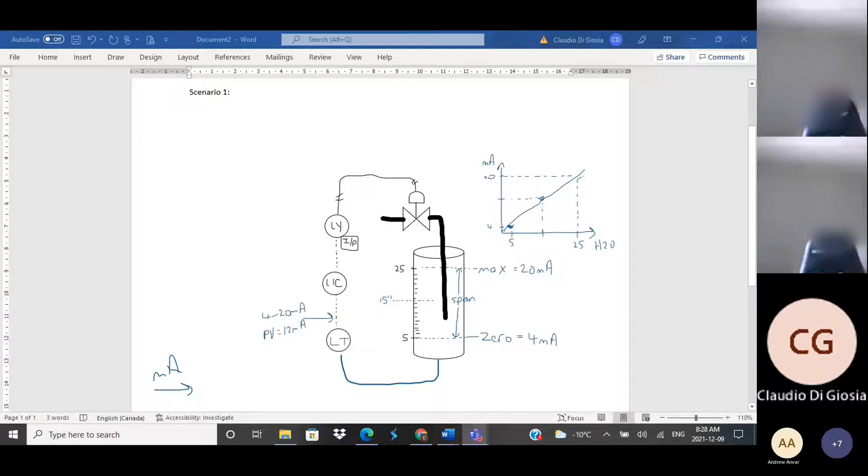So we've got a container of liquid. What we're saying here is that we have a minimum of 5 inches of liquid, which is our zero value. We're going to set our maximum to 25 inches of liquid, which is going to be our maximum value.

That's going to be proportional to a 4 to 20 milliamp signal that the level transmitter will transmit to the level indicator controller, the controller. So the controller is reading a 4 to 20 milliamp signal, and that signal is proportional to the level of the liquid in the container.

Now on the output side, the controller outputs a signal that's proportional to the error, and the error is what you have minus what you want. So your set point is what you want, the actual level is what you have. It generates an output proportional to that.

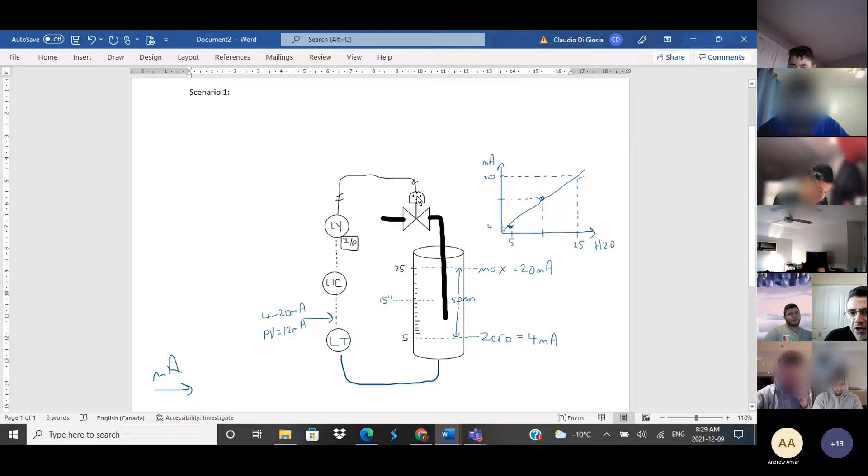That also is a 4 to 20 milliamp signal, which converts into a 3 to 15 psi signal. That 3 to 15 psi signal modulates the valve, either opening or closing it so that there's more or less liquid going through. But before we talk about all of that, this is how this whole system works.

I'm going to give you a scenario just to learn how to convert between signals. So this is a scenario: if the level transmitter is transmitting a 12 milliamp signal to the controller.

How many inches of water is there in the column of water, okay?

And just to be sure that you know what the signals we're using are, we are using a 4 to 20 milliamp system. The zero value is 5 inches of, let's just say, water, and the maximum level is 25 inches.

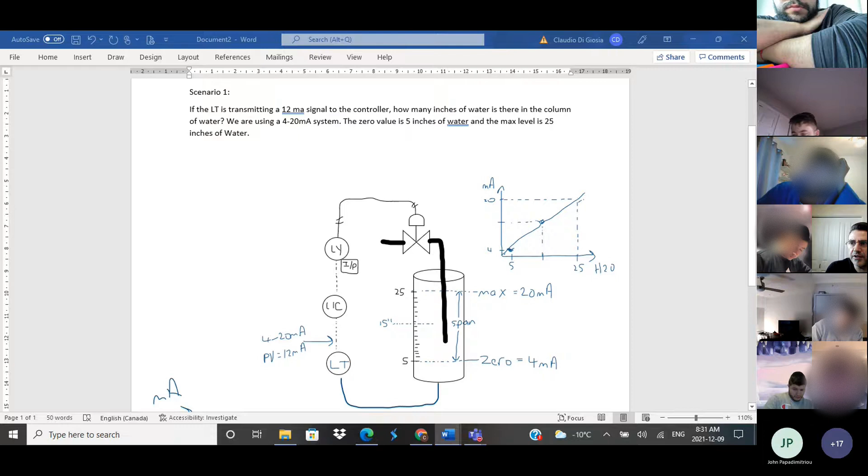So that's what we have. We have a container. The min is 5 inches, the max is 25 inches. So the signal being sent to the controller, which represents the 5 to 25 inches of liquid, is a 4 to 20 milliamp signal. So what we have to do to find the value of how many inches that represents, we have several steps.

Step one: what we want to do first is find the percentage, the span. And that is your PV, which is your process value or present value, which is what I'm giving you.

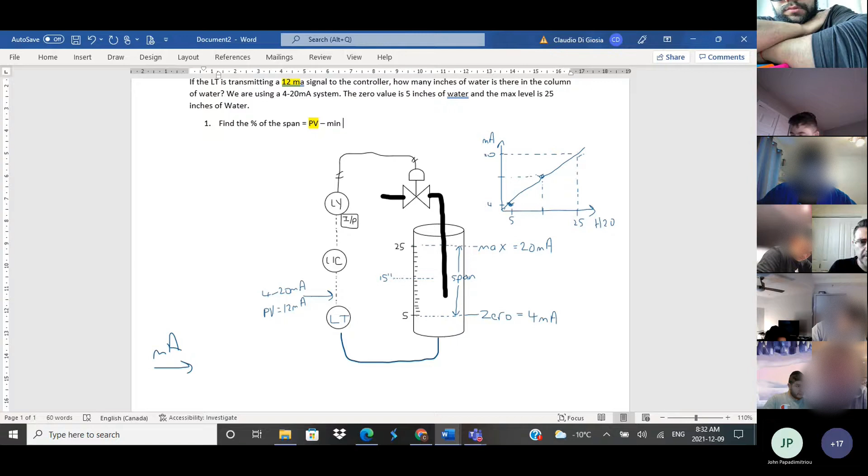In this case, the PV is 12 milliamps. That's the value I'm giving you. So PV minus the min, and that's going to be divided by max minus min.

So you've got an equation here. Percentage, how do you get it? PV minus min over max minus min.

So where do we go from here? Well, from here, what we're going to do is say, okay, what is my PV? Well, my PV is 12 milliamps. We're going to subtract the min, which is 4 milliamps.

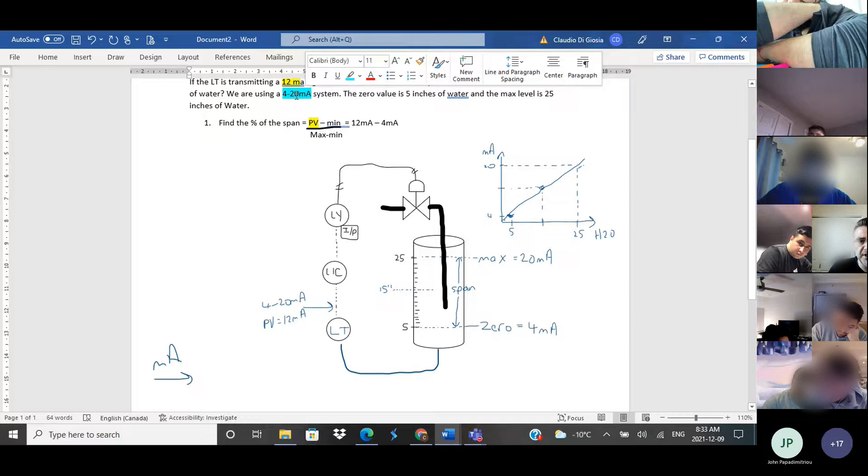Why is that the min? Well, we have a 4 to 20 milliamp signal. So if we have a 4 to 20 milliamp signal, the min is 4 milliamps, the max is 20 milliamps. So PV, the given value, 12 milliamps minus 4 milliamps over max minus min. What's max minus min? Well, the maximum of a 4 to 20 milliamp signal is 20 milliamps minus the min, again it's 4 milliamps.

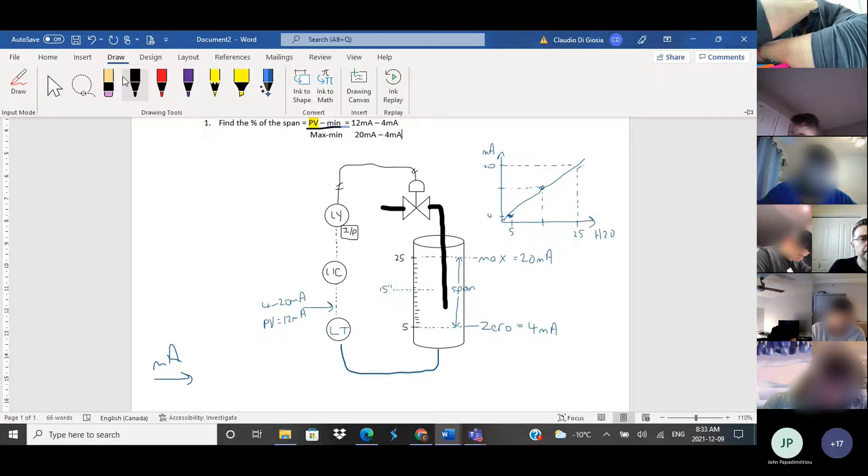Sir, isn't the zero the min value? The zero value is the minimum value, so how come you said it's 5? No, we're trying to find the percentage of what percentage 12 milliamps is within a 4 to 20 milliamp signal. That's the percentage we're looking for. This has nothing to do with water yet. We're trying to get the percentage: 12 milliamps is what percentage of this range, or this span.

So bear with me. If we do the math here, we end up with 12 minus 4, which is 8 milliamps, over 16 milliamps.

All right, and that gives us 50%. That is step 1. All that does is tell us that the level transmitter is transmitting a 12 milliamp signal, and that 12 milliamp signal is half, or 50%, of the span. What span? The span is max minus min of the range. So a 4 to 20 milliamp signal, 20 minus 4 is 16. 12 milliamps is half of the 16 milliamp range, so it's at 50%.

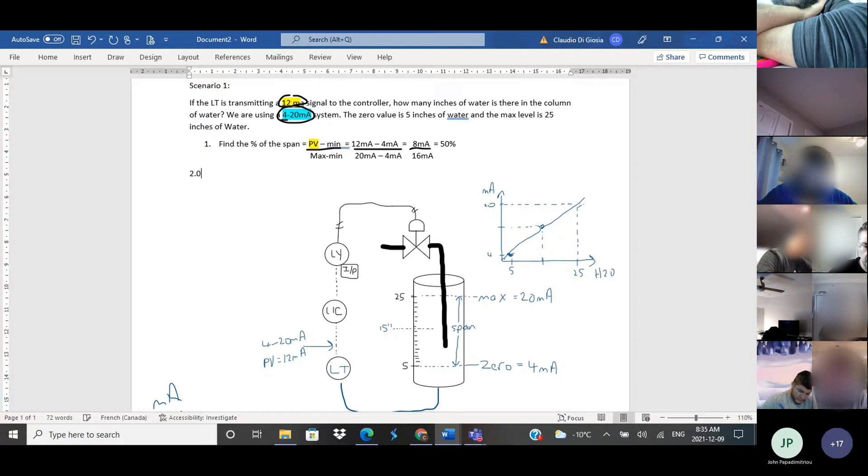But that's only step 1. We still have 3 more steps to go to get the answer here. So step number 2 is going to be, you've got to calculate the span of the variable you are converting to.

What are we converting to? We want to take that 12 milliamps and know how many inches of water that is. So if we know that 12 milliamps is 50% of a 4 to 20 milliamp signal, that means that 50% of the level in the container of liquid is what we want to calculate. So 12 milliamps is equal to what? What is 50% of the span between 25 and 5?

So we have 3 more steps to go. I'm breaking it down. Eventually you can take some shortcuts here, but this is just to make you understand how the actual conversion works. Converting to, in this case here, we're looking at water, H2O.

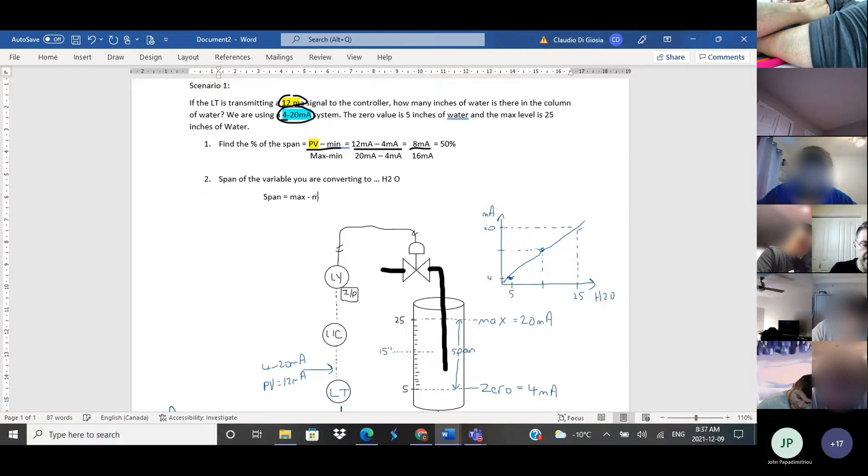So what is the span? Span is equal to max minus the min. What is the maximum amount of liquid that we have? We have 25 inches. What is the minimum we have? We have 5 inches. That gives us a span of 20 inches of H2O.

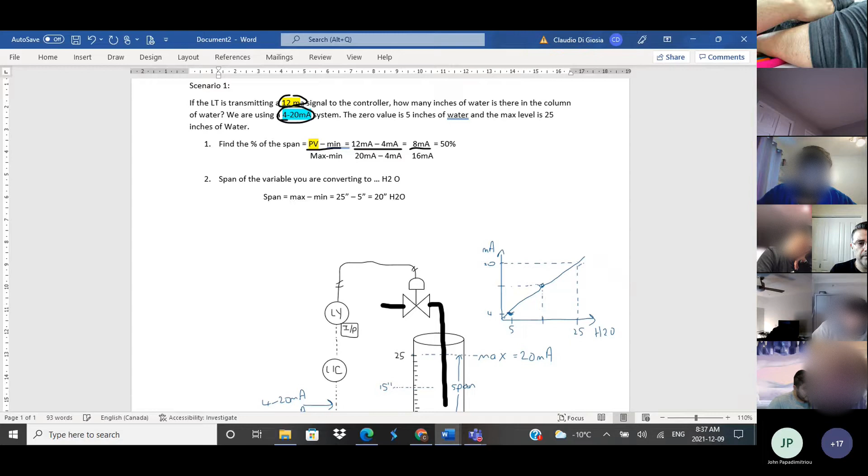So we got step 1. We're given a value, a PV, that was 12 milliamps. 12 milliamps within a 4 to 20 milliamp signal is 50%. Then we have to figure out, because we want to convert this 50% or apply it to the inches of liquid, what the span is. The span is max minus min, which means the span between the maximum 25 inches and minimum 5 inches is 20. That's how much you can move, 20 inches.

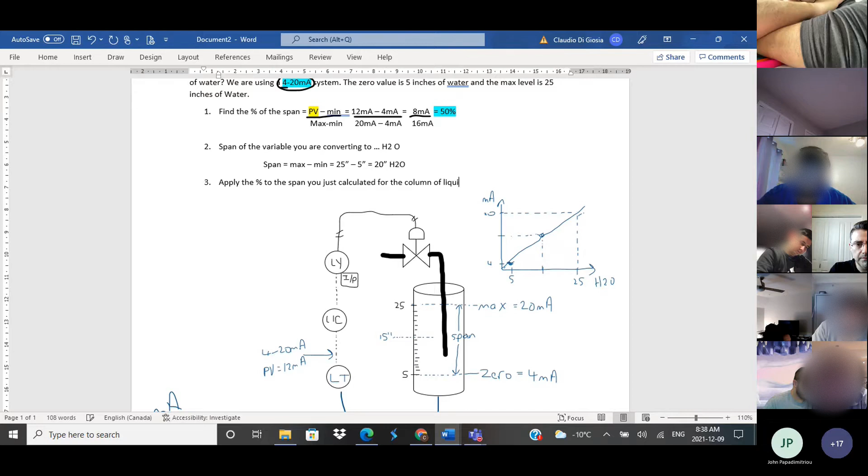Now step 3 is you apply the percentage you calculated to the span you just calculated, the column of liquid. So take the span that you just calculated, and you take the multiplication times the percentage. What is the span? The span was 20 inches. We're going to multiply that by what we calculated before, 50%.

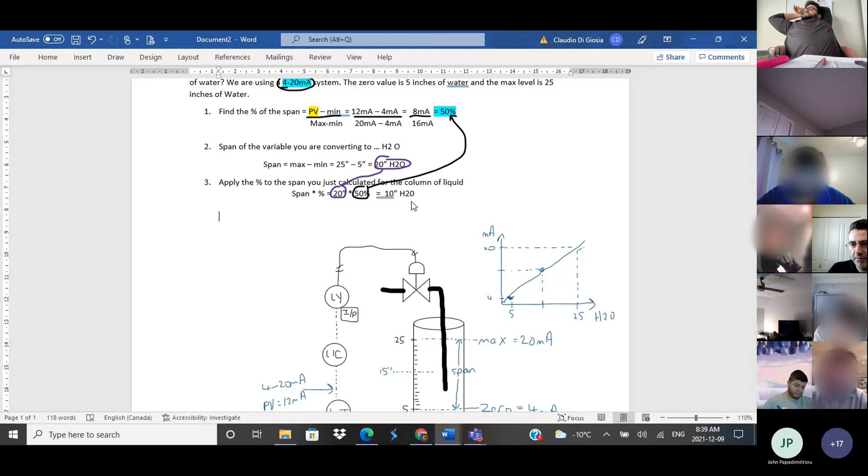That's going to be equal to inches of H2O. Just to make sure you know where these numbers are coming from, the percentage here is coming from this calculation, and the 20 inches is coming from this calculation. You get 10 inches, but that doesn't really give you how many inches are in the column of liquid, because you're not starting at 0, you're starting at 5. So you have to offset this 10 by 5, because it's 10 inches of the span, but the span, or the range, starts at 5 inches, not 0.

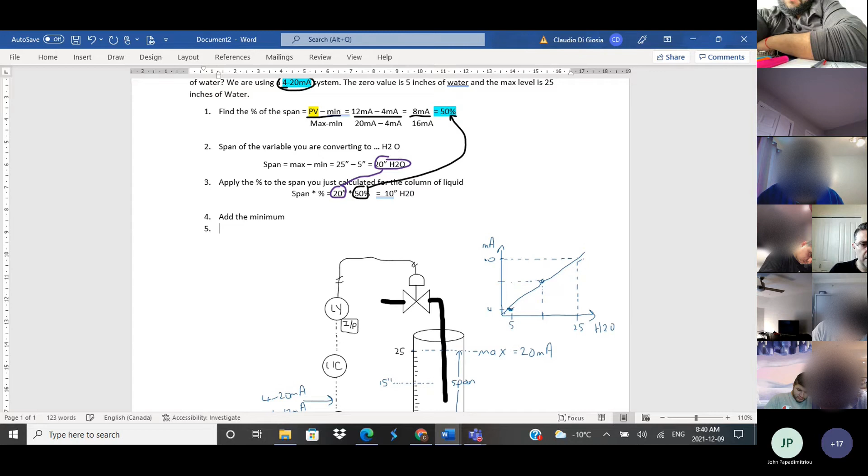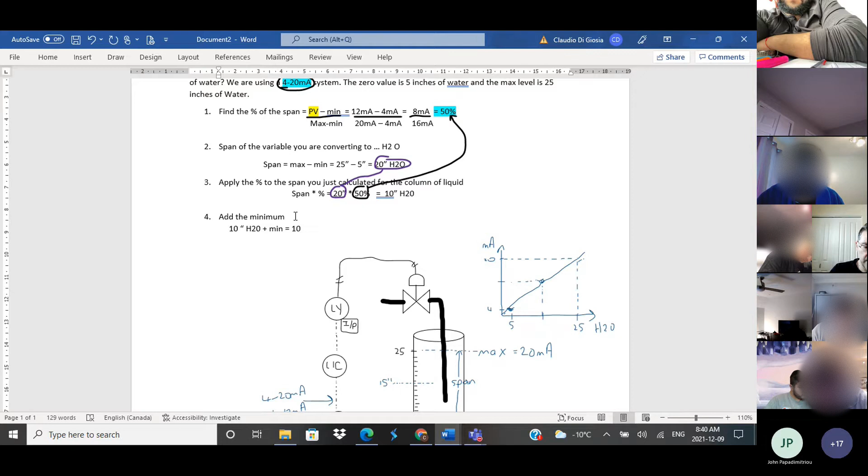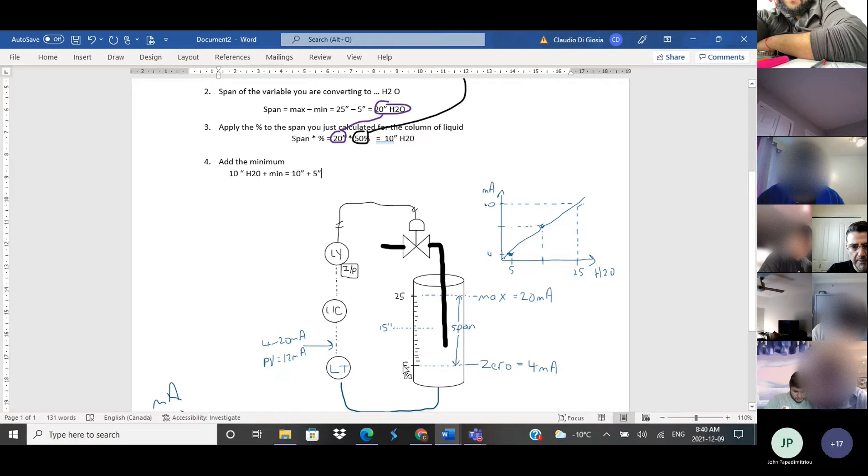So the last step we have to do is add the minimum. We're going to take the 10 inches H2O, and we're going to add the minimum. So what do we get? We have 10 inches, we're going to add the minimum, which is 5 inches. And I'm not making these numbers up, we had said we have a minimum of 5 inches of liquid here. So the answer is 15 inches of H2O in the column of liquid.

And that represents the 12 milliamp signal that the LT, or level transmitter, is transmitting.

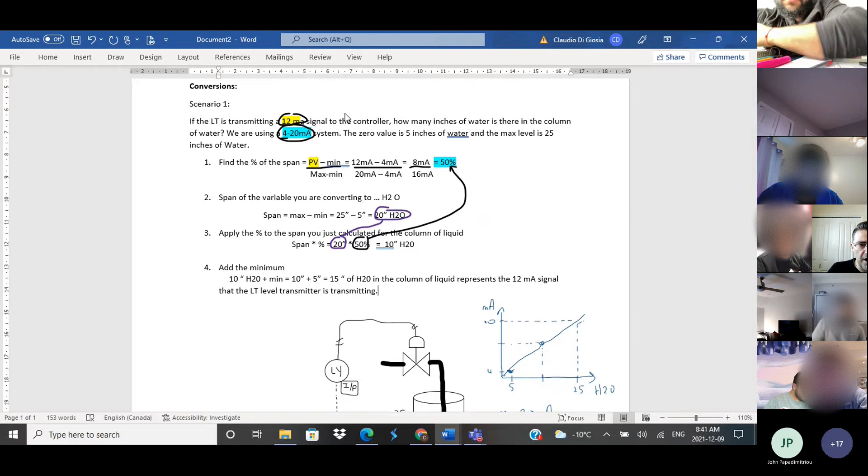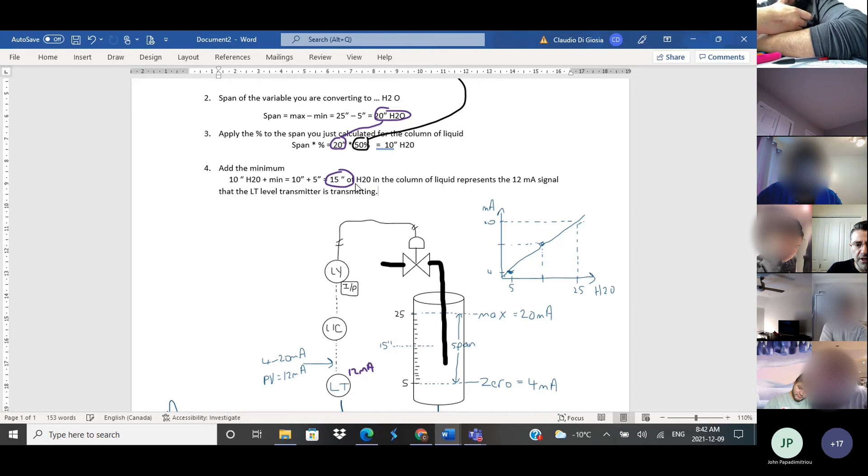So we started off with 12 milliamps. This 12 milliamps that the level transmitter is transmitting. If you're measuring this as an electrician with your multimeter on amps, you measure 12 milliamps, and you should know, based on your calculation, that you should have 15 inches of liquid, which represents 50% of the span between the max and the min. So we've taken the 12 - the first step was 12 milliamps. What percentage is that within this span? Because it's proportional, that was 50%.

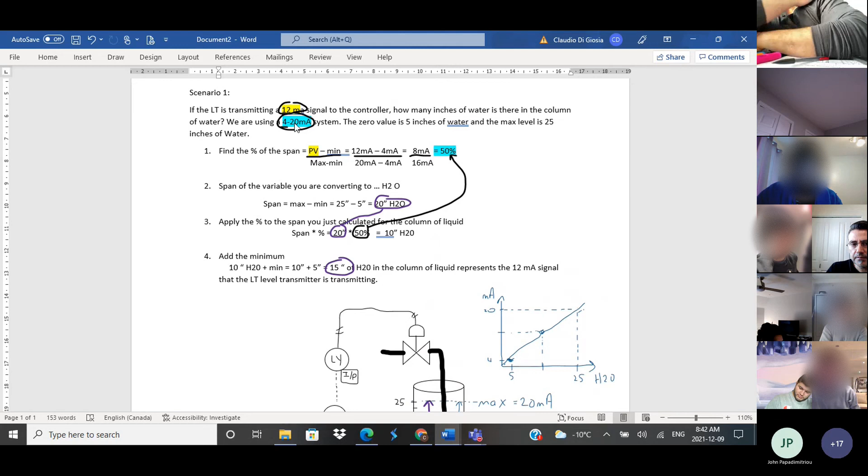So if we apply that 50% to the span of the inches of liquid, what is the span? 25 minus 5, which is 20. We take that 20, multiply by the 50%, we have 10 inches, but that's 10 inches within the span, and we're not starting at 0, we're starting at 5 inches. So we add the 5 inches, and we're at 15 inches of liquid.